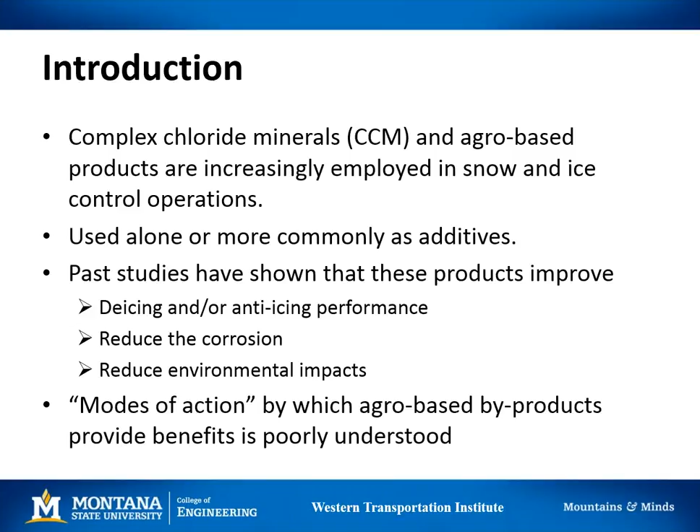Before I get into the objectives, one thing I'd like to state is that for this project, a lot of the information that was found has been initially conducted by manufacturers or vendors in order to assess how well these products work. And so less information was actually found by third-party researchers, and you'll see that in the report and in the literature review section.

So the objectives of this project were to conduct a literature review, conduct a national survey, as well as a systematic laboratory investigation. Now, the laboratory investigation was used to assess the chemical and physical processes by which the complex chloride mineral-based products and agro-based products are of value to winter maintenance.

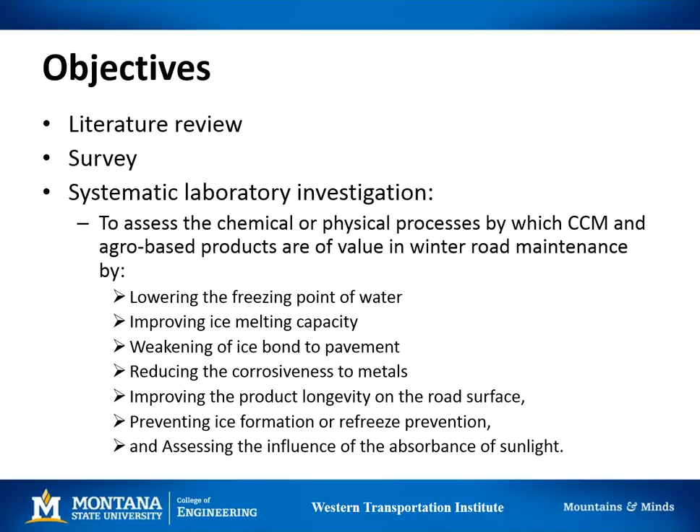So we assessed a whole suite of different characteristics, including how these products work to lower the freezing point of water, how they are used to improve the ice melting capacity, how they work to weaken the ice bond to the pavement, as well as how they work to reduce corrosiveness to metals and infrastructure, while at the same time improving longevity of the product on the pavement surface, as well as preventing ice formation or refreezing on the pavement, and assessing the influence of UV light or the absorbance of sunlight and how these products work.

In order to convey this information, we created the final report and presentation, which you're seeing now, but a part of that was the development of a best practices manual, which I believe is chapter 5 of the final report, and that's basically a summary of all the findings. And then the final deliverable, which is in the final editing stage, is a video, which is being created by the MLT group, who created past Clear Roads videos, and it's a summary of the major findings, and that eventually will be available on the website as well.

So to get into the literature review, some of the main results include that the main composition of agro-based products include desugared beet molasses, corn byproducts, cheese brewing byproducts, beer brewing byproducts, succinate salts, urea, and starch. Now these products are either used alone or as additives with other winter maintenance chemicals, as mentioned previously, so it can be used as, say, a rock salt or as a beet juice added to a salt brine. And the goal is that they can improve performance and reduce corrosion and environmental impacts.

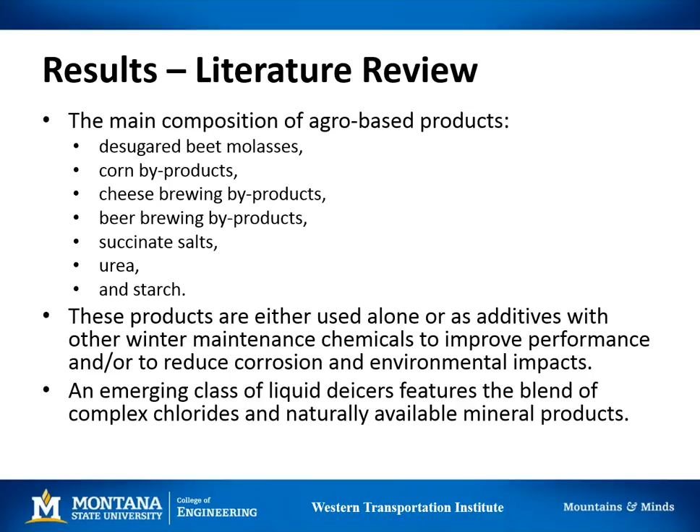And a newer group is the liquid deicers, which feature these blended chlorides as well as maybe an additional mineral component, so a complex combination of chlorides. Now, recent studies have shown that improved performance from agro-based products and naturally occurring chlorides occurs for snow and ice control operations.

And additionally, studies have shown that the use of these products leads to reduced risk to highway infrastructure and the environment. But at this time, there's still limited research that's been performed to identify or investigate the modes of action by which these products help in improving performance and reducing the negative impact to infrastructure and the environment, further supporting the need for this research.

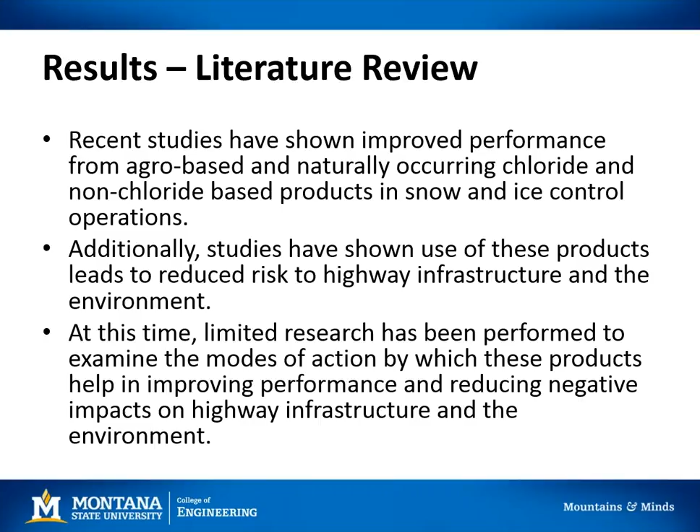And that longevity on the road surface or the residual effect of these products was one of the observed benefits of using agro-based products. Additionally, improved performance at low temperatures and reduced material usage were common benefits stated by survey respondents for the complex chloride mineral-based products. So those would be like a rock salt-based product. But again, even from the survey and the literature review, limited research was conducted or identified by survey respondents on agro-based products and complex chloride mineral-based products.

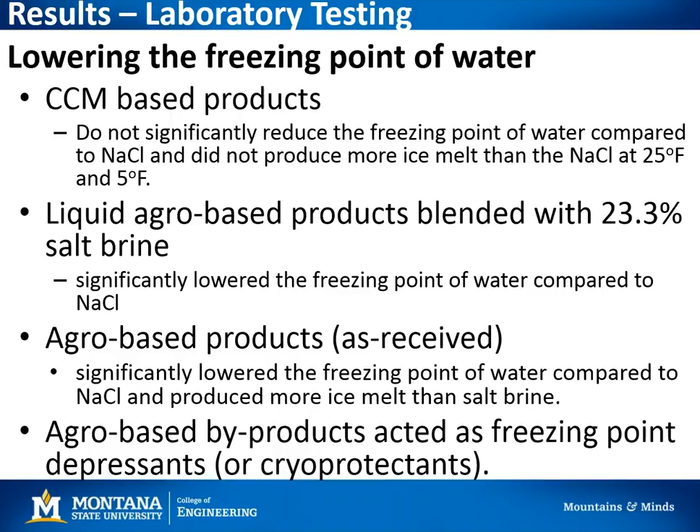And for the agro-based products as received, or those category C products, they significantly lowered the freezing point of water compared to salt brine, and they produced more ice melt than salt brine. And one thing that we'll discuss further is that these agro-based byproducts seem to be acting as freezing point depressants, and this may be because they might be cryoprotectants. And we'll get into this more later in the discussion.

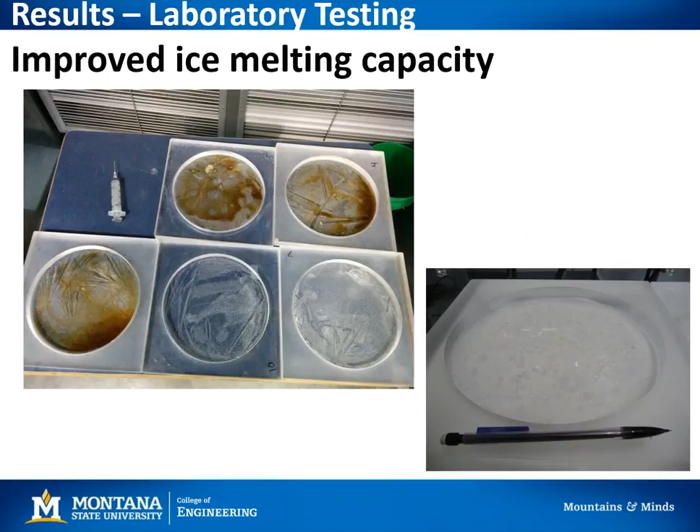So as mentioned, we also looked at the ice melting capacity of these products. What you can see here is the Petri dishes with ice lens in them, and then the product applied on top of that. So you can see some of these products, especially the ag-based products, had a much darker color, and they're easier to see than some of the other products. We used a syringe to extract the amount of ice melt over time, and these are all in a cold chamber where we can drop the temperature as cold as we want, control humidity, control the UV exposure, and make snow.

And one thing that we would recommend for future testing is to see how far out this goes. How far out do you get this continued melting of these complex chloride mineral products before they stop working? This could potentially influence when you put products down, how long you leave them out, and then when you actually return to plow. If these products are still working well, well after an hour, you may want to delay your plowing a certain amount of time based on how much functionality you want to get out of the product you put on the road.

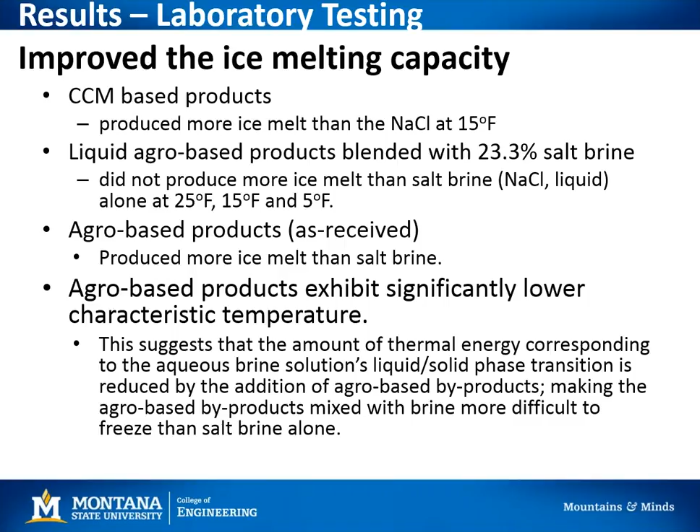And this suggests that the amount of thermal energy corresponding to the aqueous brine solution's liquid-solid phase transition is reduced by the addition of the agro-based products, making the agro-based byproducts mixed with salt brine more difficult to freeze than salt brine alone. And that's really where this theory of the cryoprotectant comes in, is that maybe these agro-based products actually prevent or halt the ice nucleation from occurring, and therefore prevent the ice bond from forming.

So another test that we did was we looked at how these products weaken ice bond to pavement. This was a really neat test that was designed. So we have these pavement samples here on the left that were made, and then we created a grid where the different products were applied. You can see here with a pipette. Now this person is in the cold chamber, so it's 25 degrees, it's 15 degrees, or it's 5 degrees, so it's very cold. We used snow that was made in-house and sieved for uniformity.

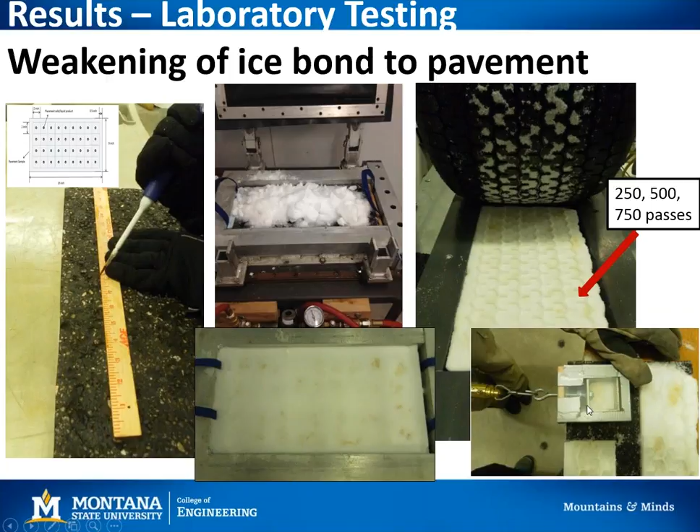It was applied and then compressed onto the pavement sample down here. You can see here some of the liquid anti-icer bleeding through the snow. And then the pavement sample with the compacted snow was trafficked using this tire, and it was trafficked 250, 500, and 750 passes. And this test method was used to measure the amount of shear strength or shear force that was required to remove this 2-inch by 2-inch section of snow and ice that was bonded to the pavement.

So here's the data. What we're looking at is the pavement sample and the product applied, and the amount of force that was required to remove that section of bonded snow and ice from the pavement. As you would expect, the pavement sample with no de-icer required a lot of shear force or shear strength to remove the snow from the pavement.

Here's a rock salt control, and then the category A products. These are the complex chloride mineral-based products. They generally performed really well or on par with the rock salt, essentially lowering the amount of shear strength necessary to remove that snow and ice from the pavement.

Category B products, so these are the agro-based products that were mixed with salt brine. They all performed really well. They all had very low shear strength that was required to remove the bonded snow and ice from the pavement. So these are good anti-icers. Better than the salt brine and way better than the asphalt with no de-icer on it.

And the category C products down here, these were the as-received agro-based products. And again, they all performed really well as anti-icers, having really low shear strength that was required to remove that snow and ice from the pavement.

As previously mentioned, a subset of the samples was then used for additional testing to try and tease out some of the mechanisms behind why these products work. Salt brine was used as a control, and then products B4, C1, and C4 were used. The ice bond test was conducted for these products as well, as you may remember, at 5 degrees and 15 degrees Fahrenheit, and you can see here the difference in the shear strength required.

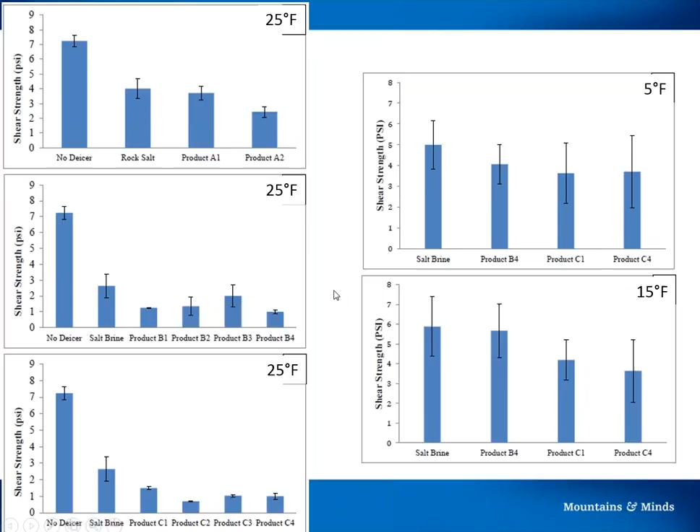One of the interesting things that came up as we were doing this testing was the fact that these agro-based products are really good anti-icers. They weaken or prevent that ice bond to the pavement compared to salt brine alone. And why might that be true? Some early research suggested that maybe viscosity had something to do with it. So as an add-on to this project, we actually measured viscosity for those 3 products: B4, C1, and C4.

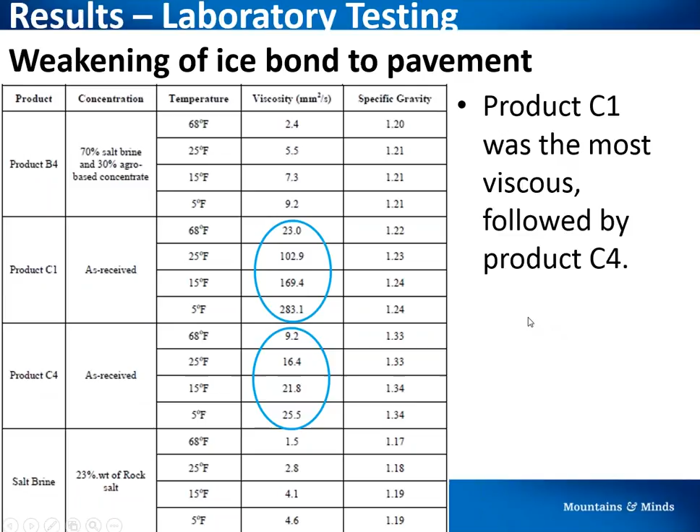And remember, product B4 is an ag-based product that's mixed with salt brine, so it has a pretty low viscosity. But products C1 and C4 were as received from the manufacturer, and they had higher, and for C1, much higher viscosities. So we were thinking that maybe viscosity had something to do with weakening that bond, or at least functioning as a better anti-icer.

So summarizing this data, for complex chloride mineral-based products, bond strength between the ice and the pavement was slightly reduced compared to salt brine at the temperatures tested. For the agro-based products, including category B and category C, so ag-based products mixed with salt brine and agro-based products as received from the manufacturer, the bond strength between the ice and the pavement compared to salt brine was significantly reduced at all temperatures for all products.

And the addition of the agro-based products to the salt brine, the category B products, increased the overall viscosity compared to salt brine alone. And the agro-based products with the higher viscosity may actually have a slower grain boundary penetration than the salt brine with the lower viscosity.

I don't know if you remember from the picture we showed previously, but you could see some of the anti-icer bleeding through. Essentially what happens is the snow wicks up some of the liquid off the pavement. And what we're theorizing is that the more viscous or thicker the product, the less will be sucked up into the snowpack, so it will be left on the pavement to actually work as an anti-icer.

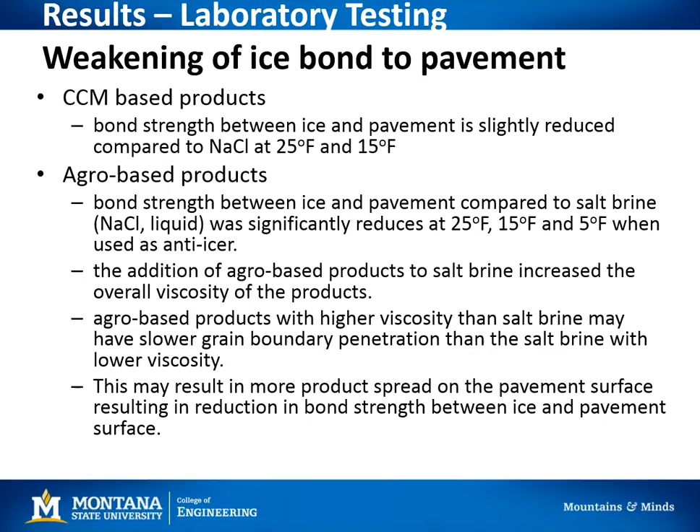So to further investigate this, we looked at how these products improve longevity on the pavement. And this was mentioned as one of the benefits of the agro-based products from the survey respondents. So we used those same test methods where we had the pavement sample, we applied the product, we compacted the snow on top of it, and then we trafficked it for 250, 500, and 750 passes.

And then we measured the bonds, or the shear strength that are required to move that patch of snow or plow that snow off the pavement for these 4 products. But we did it at colder temperatures. We did it at 15 and 5 degrees Fahrenheit.

So to flip this component of the lab testing on the other side, we measured the shear strength to say how much plowing force does it take to remove the snow and ice for the various products. But we wanted to look at the snow that was left, and from that snow, how much product was actually up in the snowpack instead of on the pavement surface.

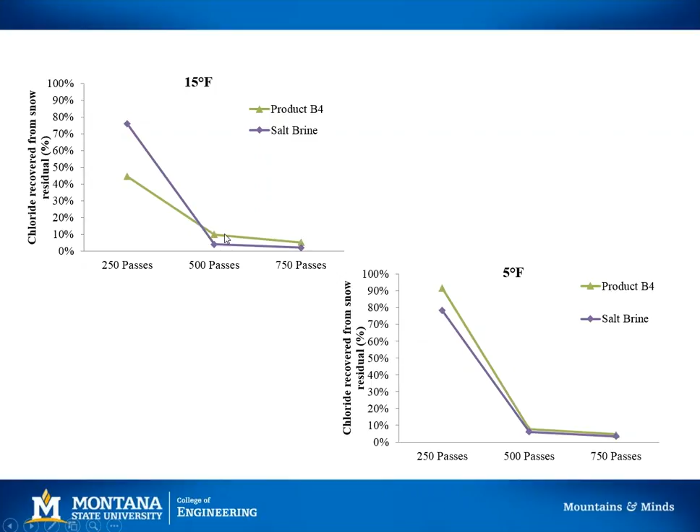And then by 500 and 750 passes, the amount of product that was wicked up into the snowpack significantly dropped down to 5 to 10%. So for the agro-based products mixed with salt brine, after about 250 passes, the bulk, at least half at 15 degrees and up to 90% at 5 degrees, of this product is wicked up into the snowpack and removed with plowing. And only a tiny fraction, 5 to 10%, actually remains on the pavement surface.

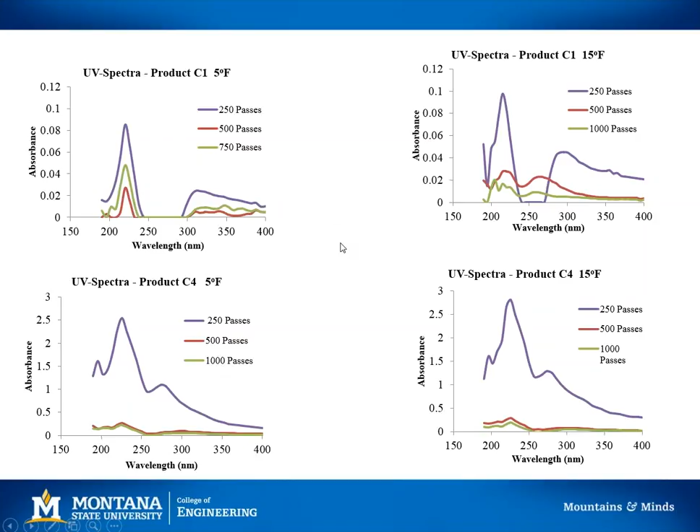So to summarize, for the agro-based products that were tested, and these are just the B4, C1, and C4 products, they tend to stay on the road surface longer than salt brine alone, and the longevity of the products on the road surface depends on the amount of product that is dissolved into the snow or wicked up into the snow before each plowing cycle. And agro-based products tend to wick less into the snow when compared to salt brine, and this may have to do with the viscosity of these products.

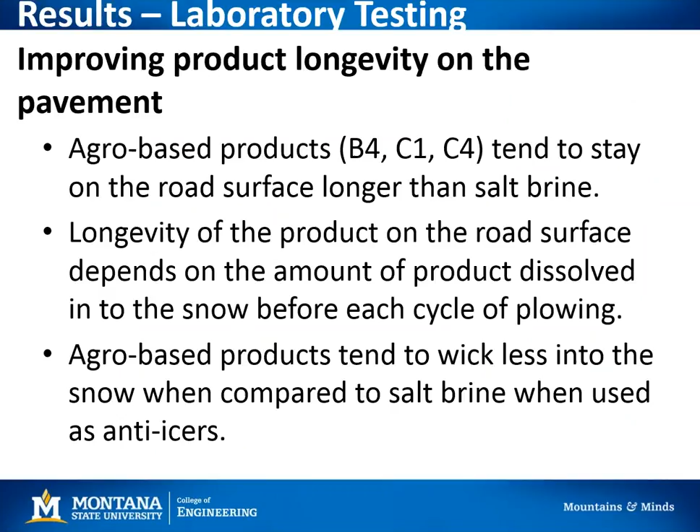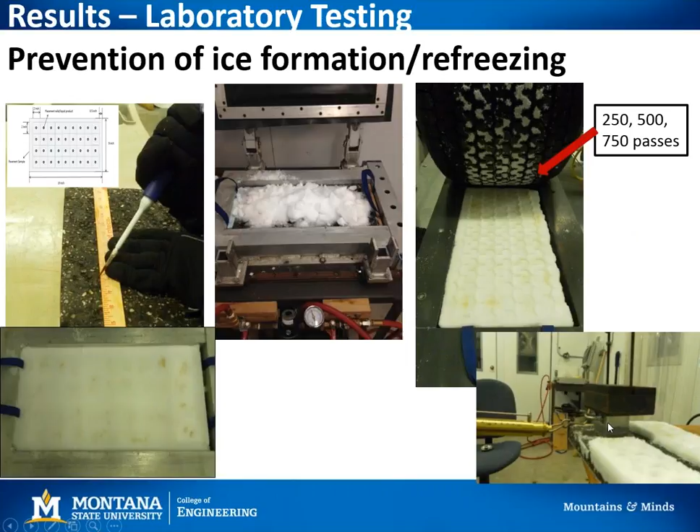So we also wanted to look at how these products prevent ice formation or refreezing, and this was actually measured using the friction coefficient. So we used a similar method to prepare the samples. We put the product on the asphalt, we made the snow, we compacted it, and then we trafficked it. And while this looks very similar to the shear force or shear strength, it's actually measuring friction. And we'll just get into the data.

So what we have here is two figures, and we have friction coefficient on the y-axis and the number of passes on the x-axis and the different product types. And what you can see here is that at 250 passes, you have a pretty high friction coefficient that steadily decreases with time. So the roads are getting more and more slippery with time at 15 degrees. And there's a similar trend, but a less pronounced trend at 5 degrees. Basically, the roads are just slightly more slippery at 5 degrees in general.

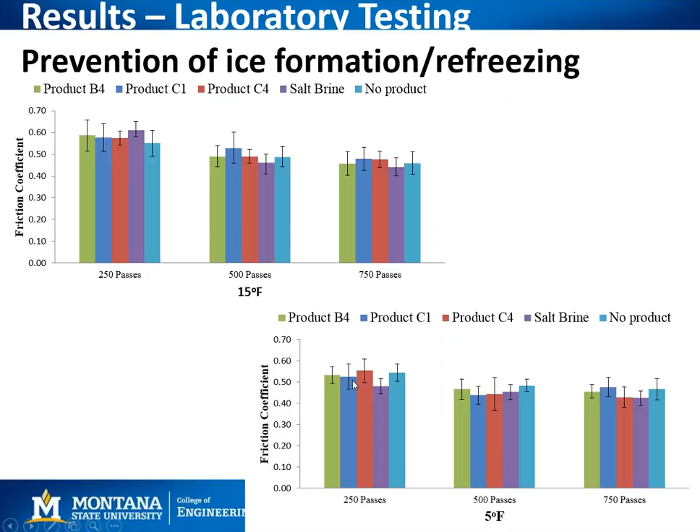So to summarize this data, the agro-based products tend to have better friction values during the extremely cold snow events and during the repeated warm snow events. And the agro-based products act as ice crystal nucleation point inhibitors, delaying ice formation compared to salt brine. Now, these are the cryoprotectants I was talking about earlier, which are substances that prevent ice nucleation from occurring. And the agro-based products significantly reduce the freezing point of water, therefore could act as these cryoprotectants, delaying the freezing point of water while not necessarily having a higher ice melting capacity.

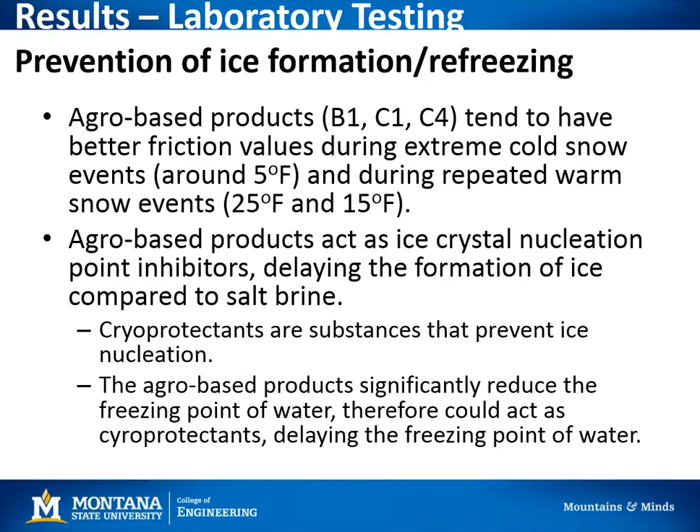Another aspect of the lab testing that we looked into was the influence of UV light. So we looked at the absorbance of sunlight, not only if it impacts the product in terms of degrading it, but also does it influence the product if it's darker? Does it melt more product? Here you can see this is the ice melting test again in the cold chamber. And you can see there's an ice lens with some product put on top of it. And then we expose these samples to what you would typically see in the wintertime in a northern snowy climate. So we're thinking like Idaho, Montana type of sun exposure.

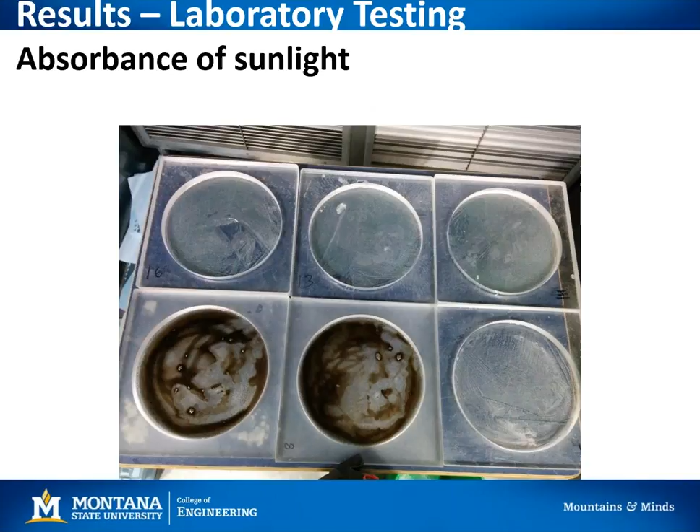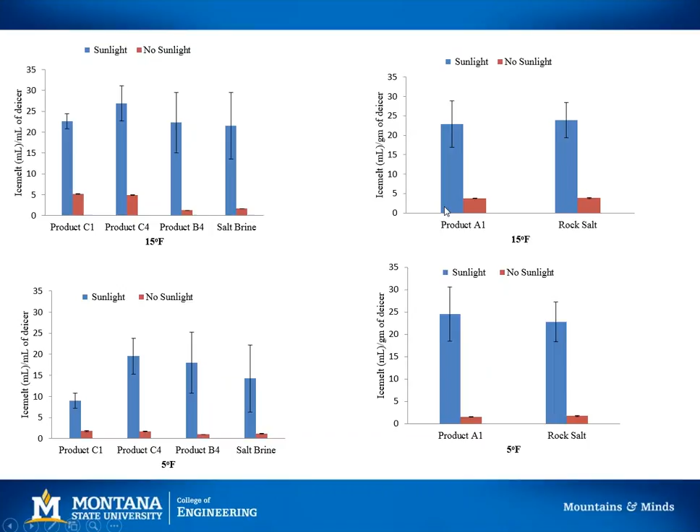And here's the data. So for these 3 products and the salt brine control, we measured ice melt at 15 and 5 degrees. And one major thing that you can see from this data is that regardless of product type, UV light adds to melting capacity. It significantly increases it. So we also measured the ice melting capacity with no lights on and no UV exposure. And you can see here that there is ice melting occurring, but the ice melting rates are much lower than with the direct UV exposure.

So in summary, for complex chloride mineral-based products, with higher intensity sunlight, which is the direct UV exposure, the ice melting capacity was similar regardless of the product type. One interesting thing that we found with this test, it was the first time we had ever done it, was that even though the environmental chamber had a very tight temperature control, the sample that was directly under the UV light had more melt than if it was on the outside of the exposure to the light.

So we basically shifted all the samples multiple times and collected data multiple times to hopefully even out this exposure. But what we realized was that we could categorize the ice melting rates of these by high intensity exposure and then medium intensity exposure. And so that's kind of what we're getting at here. So for the complex chloride mineral-based product, with medium intensity sunlight, the ice melting capacity was slightly higher than for the salt control.

While for agro-based products with the higher intensity sunlight, the ice melting capacity was similar regardless of product type, regardless of temperature. And one of the interesting findings that we were hoping to tease out of this was that at the colder temperatures, the darker colored agro-based products had higher ice melting capacities than the lighter agro-based products. And that likely has to do with the albedo factor, and that darker products will absorb more light than the lighter ones.

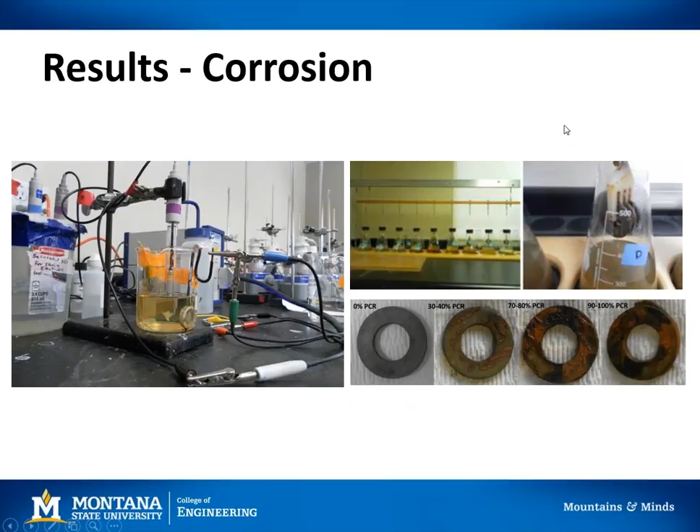And the percent corrosion rate is actually a calculated value compared to salt brine. And then this is a 30 to 40% exposure, 70 to 80%, and then a 90 to 100% corrosion rate exposure. And we also measured electrochemical corrosion rates to compare the two. So what did we find? Well, now again, remember, this is all relative to the corrosion rate of salt brine.

So you can see here that the percent corrosion rate for the PNS dip test for salt brine is normalized at 100%. And so you would hope that all the products would have a lower corrosion rate than the salt brine. And again, these products were tested at a 3% concentration, and that's just the standard practice for these tests. So when you compare them to the salt brine, the complex chloride mineral-based products had lower corrosion scores, which is great, but they're still pretty high.

For the agro-based products that were mixed with salt brine, for most of these products, you can see that they had significantly lower corrosion scores, though one did have a higher corrosion score and may just need additional testing. And for the as-received manufacturer created agro-based products, again, they all had significantly lower corrosion scores than salt brine. So there is some truth to the fact that people say that these agro-based products have lower impact on infrastructure.

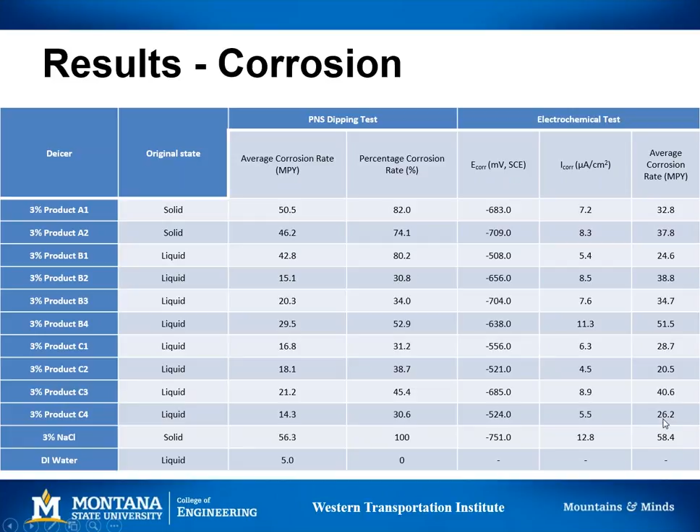And the electrochemical data, or the average corrosion rate, which was calculated, falls in line with these. So here's the salt brine control, and you can see here that all the products, with the exception of a few, they're a little high, have much lower corrosion scores.

So in general, the PNS dip test, which was that test where you dip those 3 washers in, revealed that the complex chloride mineral deicers do have a slightly lower corrosion score than the salt brine control. And most agro-based deicers in category B and category C have much lower corrosion to carbon steel than the sodium chloride controls, with the exception of one product, and that just may need to be retested.

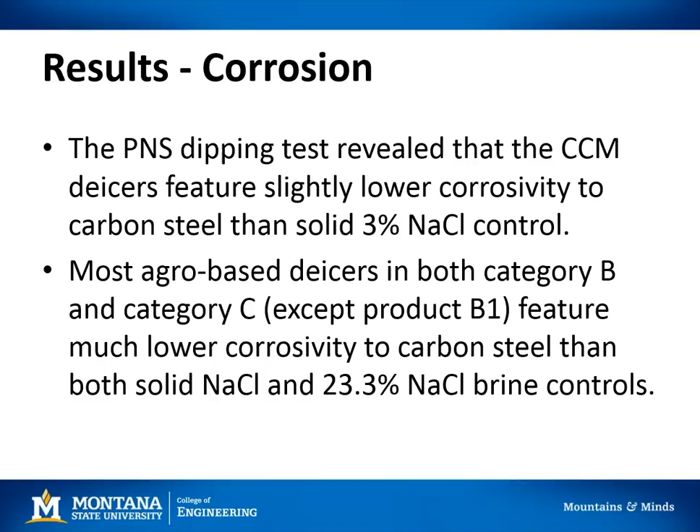So we're going to shift gears here. All of the information just presented was on all the lab work that we just completed. And then one of the tasks that was mentioned was to take this information and create a best practices manual. So what we did was we summarized the findings of the lab results, and we included that in the best practices manual.

Other components of the best practices manual included information on storage guidelines, material handling and loading, storage and mixing, brine production equipment, application methods and guidelines, anti-icing and direct liquid application, and then also identified issues with agro-based products. And I'm just going to quickly summarize what's in the manual.

So for material handling and loading, one of the important things that was identified was that for loading solid products, those complex chloride mineral-based products, often they're loaded with buckets that are too large, and this leads to loss of material. So one recommendation is that folks use a smaller bucket. It may require a longer loading time because more buckets are required to fill the back of the truck, but it reduces loss of material on site.

And then also loading equipment should have a way to track these quantities. And some equipment does, but some doesn't. And I think for a lot of folks, it's just upgrading to newer equipment or tracking systems so that you know if you're losing material, if people are sticking to application rates, and then you know how much you have on site, how much is going out, how much is getting put down on the road.

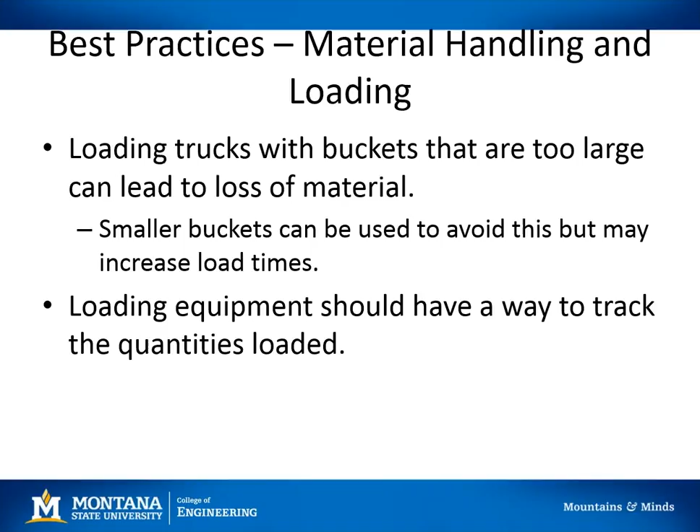For storage and mixing, especially for the agro-based products, use blending ratios that work. For our lab testing, we used the blending ratios for the ag-based products that were recommended by the vendors. Now, the vendors, they sell you the product that's going to work at its peak performance. And so when they suggest a blending ratio, they do it for a reason. So if you're going to modify a blending ratio, you should have a really good reason for doing that.

And if you do modify a blending ratio, you need to track it, you need to study it, you need to see what worked and what didn't work. And I actually suggest if you do start modifying blending ratios, put it out on the Snow and Ice listserv or put it out to the Clear Roads group and say, hey, we're trying this. It worked, it didn't work, here's what we do next time.

I think a lot of folks could learn a lot from that kind of information. Additionally, blending solid materials, well, I guess in this instance it would be pre-wetting. It's not recommended to do it on the apron. It's really not accurate and it's not very efficient. Instead, use a metered supply line to blend at the pile or on the truck. And here you can see a truck is metering out the blending rate, and then they'll move the pre-wet solid material inside or load it in the truck.

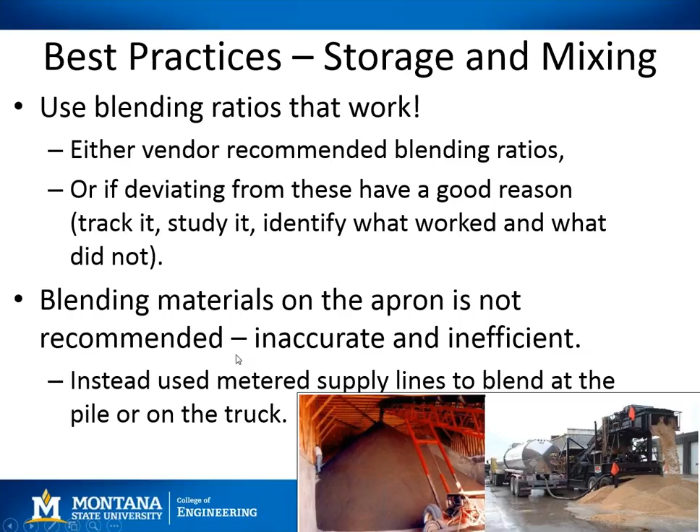For solid storage guidelines, solid material should be stored on an impervious surface and covered. And I'm just going to keep hammering this to folks. I know you've been hearing it for a long time. Almost everyone's doing it. Some people are trying to move towards it, and it's very important. Storage facilities should be designed to accommodate typical runoff in your area. They should provide sufficient space for indoor loading and unloading, and consider prevailing wind direction to limit snowdrift and precipitation indoors.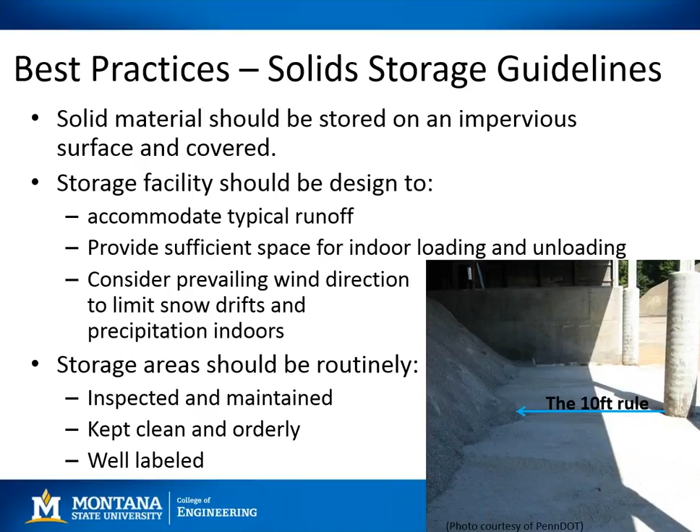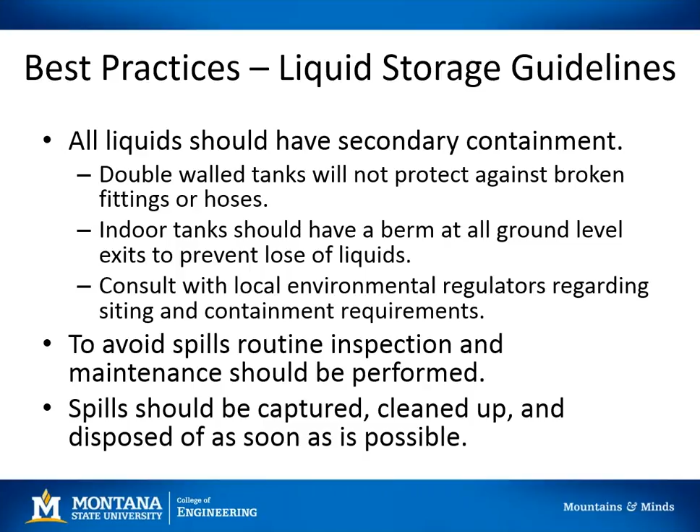One thing that came up with secondary containment was that a lot of folks have a water release valve, because if your tanks are outside, if it snows or rains, that liquid will build up in that secondary containment. And so they will just essentially release the water out of a drain. But if you forget to close that drain at night and your tank breaks, then you're just going to release all that material and your secondary containment is useless. So have a check system in place to make sure that valve gets shut after you're done draining out the excess water.

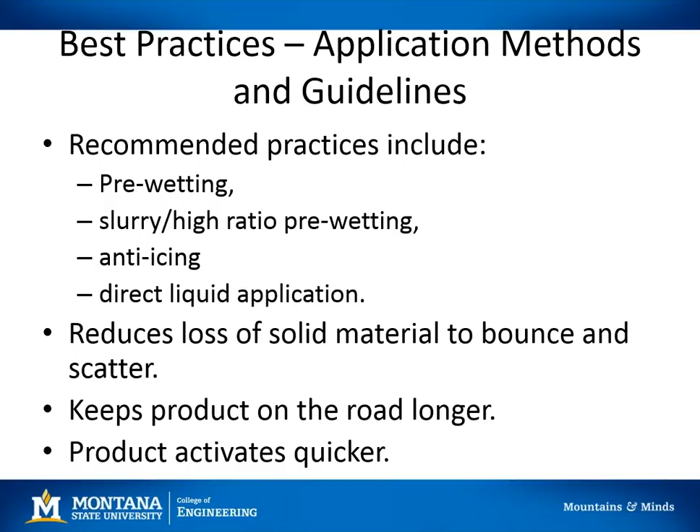Application methods and guidelines. Generally, we recommend pre-wetting or slurry and high ratio pre-wetting, anti-icing, or direct liquid application. All these practices reduce the loss of material to bounce and scatter. It keeps the product on the road longer, and the product activates quicker. And then some issues that have been identified with agro-based products, which generally can be dealt with, but may have hindered some folks from using them thus far.

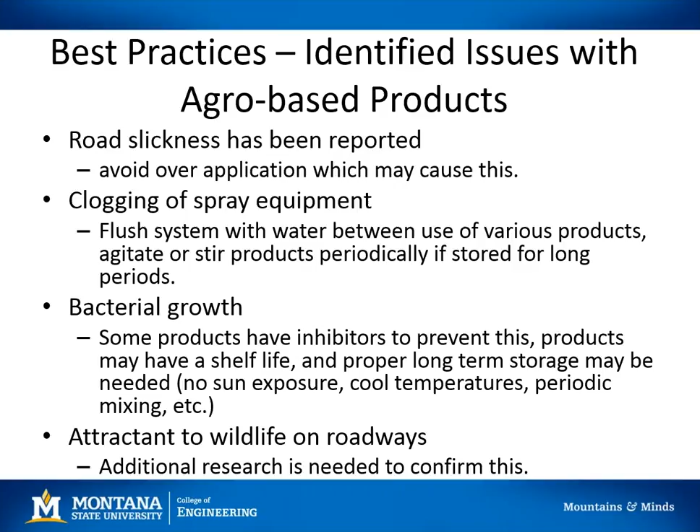Okay, from Clay Adams. He asked, regarding the corrosion testing, we noted that one of the ag-based samples had a higher corrosion score, and we suggested retesting. At this point in time, we don't have plans to do additional corrosion testing. We actually tested each sample more than triplicate, but it may be a factor of the batch that we received.

So what we actually recommend is when you order products, get third-party testing on them, or go to the qualified product list on the PNS website and see what their values are and compare it to yours. If you don't have in-house corrosion testing, there are some places around the country that can do that for you. But generally speaking, agro-based products had much lower corrosion than salt brine or rock salt alone.

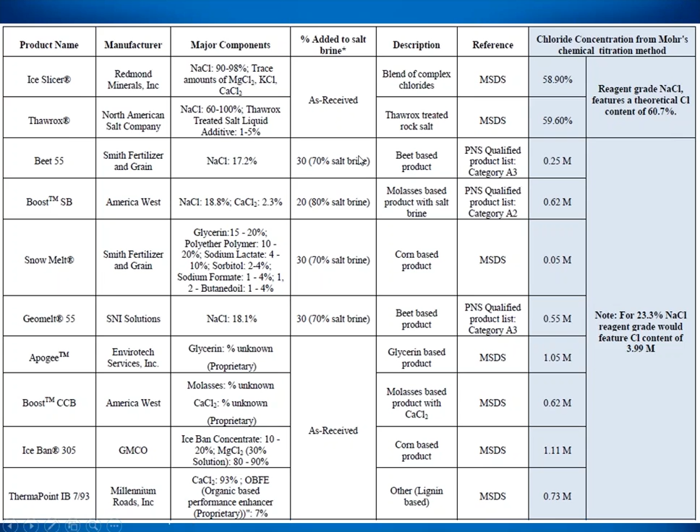Now, with that being said, we also found that the ice melting capacity for these products continued, even at 15 degrees, past an hour. And that's really where I recommend that additional testing is, while these products may not have the lowest eutectic temperature, they seem to work for long periods of time. And knowing how long that product can work is very important.

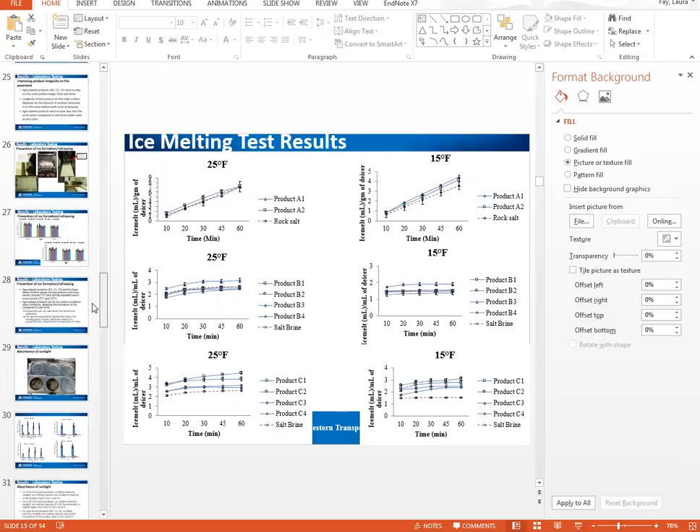But there is another question by Clay in the chat box. Clay asks, what % solution of Ice Slicer did you test? For the ice melting test, it's applied directly as is. So the grains are sieved so that they're uniform and then applied. For the corrosion testing, they're all tested at 3%. So it's uniform across the board.

For the eutectic, I'm going to have Ambu. Ambu did the eutectic testing. Is he on the line still? Sure, yeah. Let me go to that slide, actually. Clay just wants to know what concentration the Ice Slicer was tested for the eutectic curve. So basically how this eutectic curve is created is, you see the solution concentration, the slide number is 12, I think. Laura, can you go to that number from your side? There you go. Yeah, thank you.

So if you see the solution concentration, that tells how much is the solution concentration by weight. So let's say, for example, we take 10% by weight of Ice Slicer, and then we allow it to freeze and find when it freezes. So that is the data point there. Then you take 15%, then you take 20%, and it goes on like that. So what happens is at one point, the concentration is so high that it will start to freeze earlier. So there is no fixed concentration. It is tested at different concentrations. So hope that answers the question.

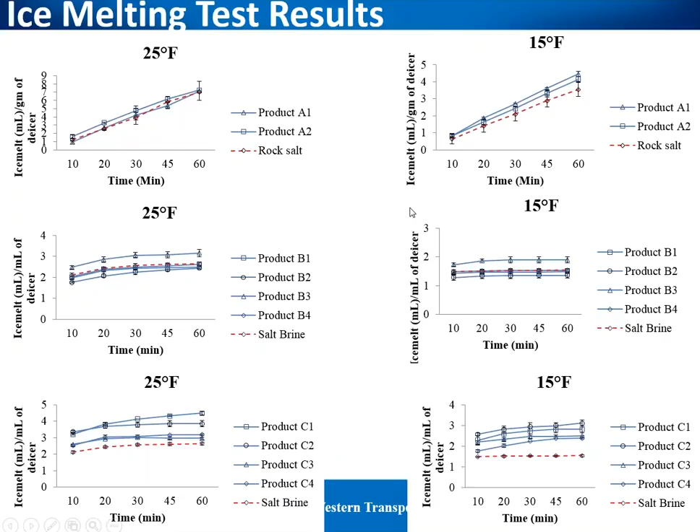So in terms of bracketing an effective temperature range, we did not do that for this project. But we did characterize the characteristic temperature using the DSC, the eutectic temperature, and then the ice melting capacity at various temperatures for each product.

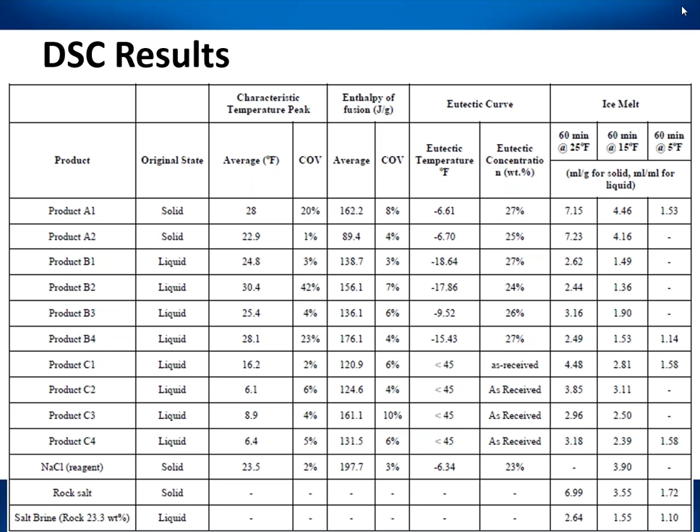Laura, this is Scott Lucas here with Ohio. One thing I was kind of curious about, and I've seen this a lot in the eutectic temperature on the phase shifts, when you start getting over that 23% solution of material, you have the refreeze rate in that. In the field environment, how easy is that to obtain? Or is that something that should be of concern to the actual workers out there? Or is this more just a lab-induced type of response, or what are we looking at?

So I brought up the eutectic curves. This is just my feeling, and I'll let maybe some other folks like Ambu and Ron and the guys out in the field talk. But you know, these are lab results. These are ideal condition results. And what you're going to see with a lot of these products is you may apply them at your ideal concentration, but then they're going to be diluted.

So to me, what's really important here is your ideal applied concentration, and then what's going to happen as they dilute. So as the solution concentration gets lower, you see that a lot of the products still perform, their performance just reduces with time. But with that said, maybe I'll open the floor to Ambu or Ron to comment on that.

I guess to further cover that, the only thing I was curious about with that, Ron or somebody could cover this as well. A lot of people have the practice of constantly salting bridge decks. We've kind of taught that many times in the past to make sure you have that, or interchanges. I know guys that have that common practice of doing that, and we're creating more issues than we're helping in those cases. I don't know if anybody saw anything like that in the field in reality, or if it's once again just a lab thing.

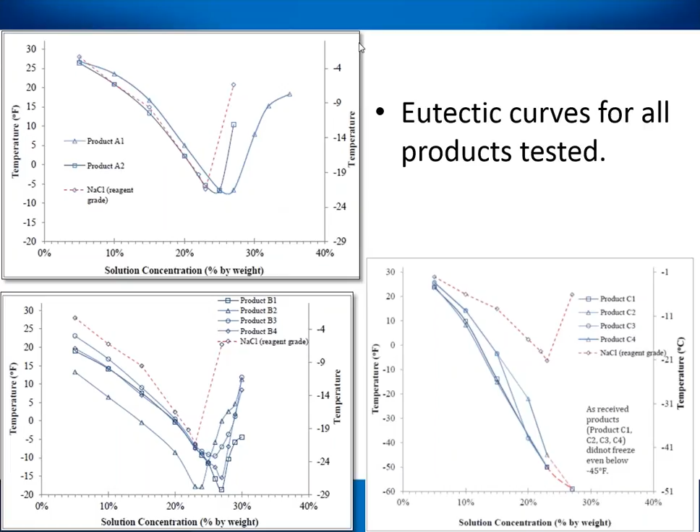Okay. And I don't know, Laura, if you've got a eutectic curve phase diagram in there that's labeled with all the bisects for water, solution, ice, and solid, the solid being the chemical phase turned from a liquid to a solid. You get crystallization of ice, but as you keep going up, you can actually form the solid material with ice in it. But it depends on the temperature. Right. Yeah.

We didn't make one, but you can see one here on the bottom right hand of the screen of the standard salt eutectic curve, where you get too much salt, you get refreezing, too little salt, you get refreezing, and there's this magic area. The hard part is keeping that magic area on your pavement.